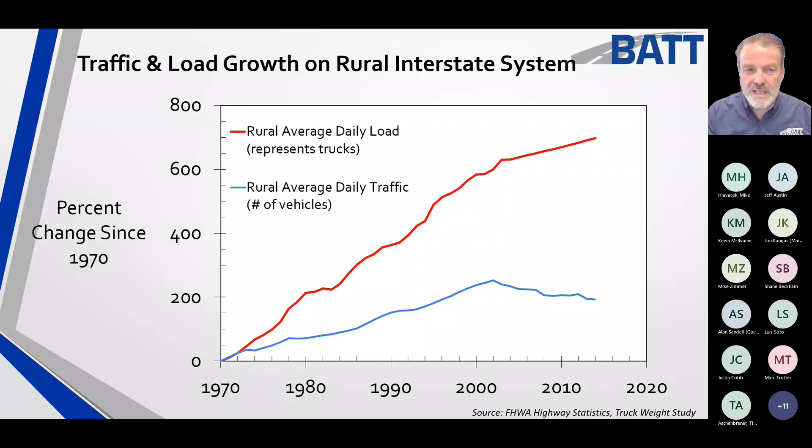So in today's world, I've got to modify to meet these things called balanced mix design. Today you're seeing these diagrams put out with cracking on one side of the graph and rutting on the other. I call it performance-engineered mix, I call it performance testing. The term that's caught on is balanced mix design, where we balance the rutting with the cracking.

In that process, we use a mix performance test on conditioned samples to address different modes of distress: cracking, aging, traffic, rutting, climate—all those different things—to put all that into a package to make sure that we can make a pavement last longer.

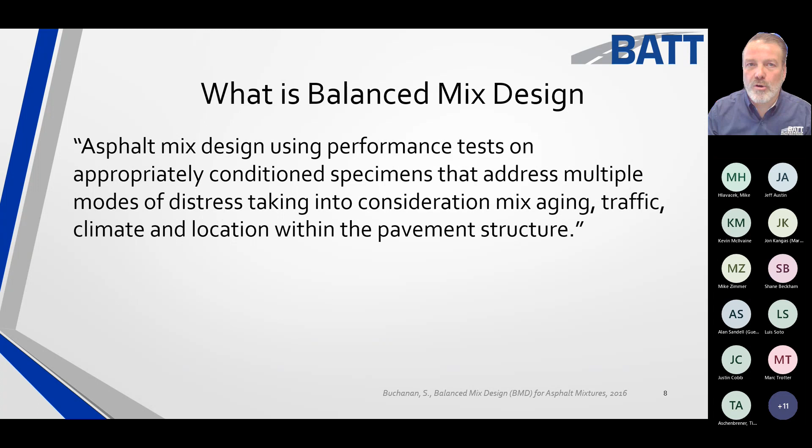Now this is just an example of taking a Kentucky mix that I worked with. In this mixture, we simply added asphalt. We were at 5.4%; now the state of Kentucky is more near 6% on their mixtures. But back in the time, about 10 years ago, we would just add asphalt to the mixture. You can see I added on this one 0.5%.

And my APA device at the time, and my beam fatigue test I was running, the needle never moved on that mixture. However, it became more compactable, which is another story—as we improve density in the field, we also extend pavement life. This is just looking simply at putting more asphalt in a mixture.

Then we found out if I continue to add more, it did exactly as I thought: my cracking would greatly increase, the top right corner, and my rutting would begin to go down. Now you may look at that and say, oh my goodness, my mixture is going to rut. Folks, our mixtures are so rut resistant today.

Moving the needle on that APA or Hamburg, I strongly encourage you to see how low can you go. Put some test sections out there, because we have way over-designed on rutting for most of our mixtures that I'm seeing today. We have a lot of room. That was on a mixture where I added up to 1% of asphalt to get that needle to even move.

Balanced mix design, if I look at it in this sense, and if I look at this plan here, this sort of looks like what's going on. This is the identical way, but on mine that I backed up, these two curves that are separated here didn't really separate on mine. Now, if I took them way out to the left, you would see that change a little bit. But the concept has been out a very long time, and some of these processes were not just invented. These concepts have been out for quite a long time.

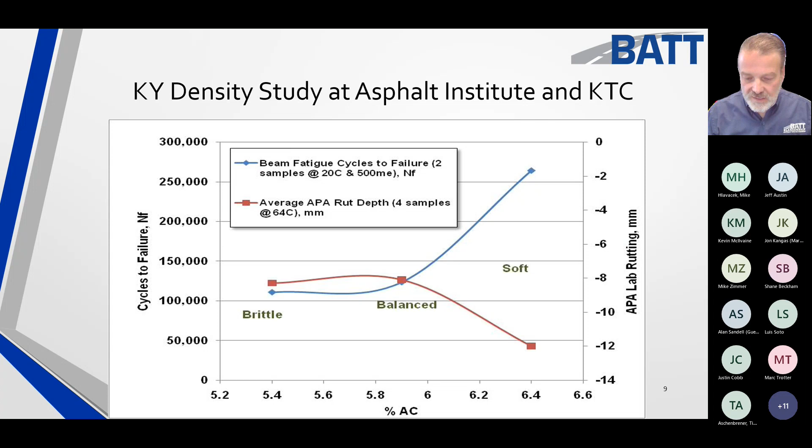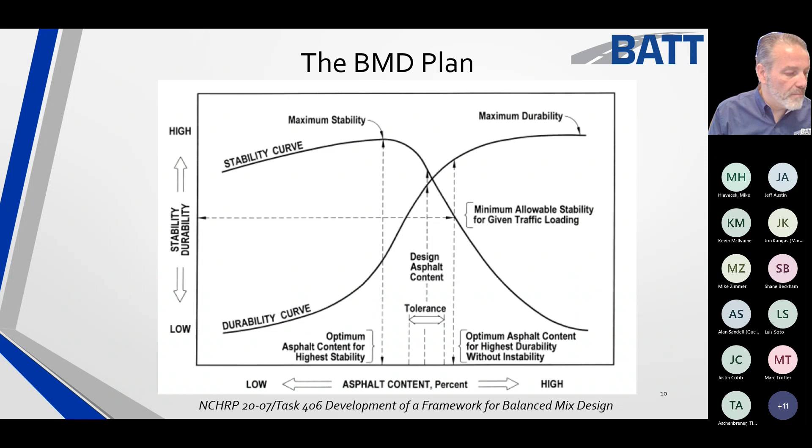So to get where I want to go, if I wanted to move over in this area to really increase my durability, I can't just add asphalt. Same thing here, I can't just add asphalt. I have got to open up my mixture to be able to allow it to accept more asphalt. So I've got to change the structure of my aggregates. Some cases that means washing the aggregates. Some cases that means a different size aggregate. And states right now, different contractors are exploring different options that can be looking at modification of the asphalt, modification of the mixture, and all of the above.

That's where the fiber comes in.

So why do we move back and forth from rutting and cracking? If I were to open this up to a discussion, the comments I would hear would be, hey, I remember in the 80s when we had rutting, and I remember the guys talking to me before that they had a problem with cracking, and we caused this problem. And now here we are today talking about cracking again, and we just have a pendulum that goes back and forth, and give it 20 years and we're going to be dealing with rutting again. I don't think so.

Yes, on where we've been, but now that we have these performance tests in place, Ideal CT, SCB, DCT, pick your poison on cracking, Hamburg, APA, flow number on rutting, Ideal RT, the hot IDT, whatever you may have, we have tools today that we didn't have 20 years ago. We did have them on a research level and in the laboratories, the bigger labs, but we didn't have these at a contractor level and a state level. And now we can measure rutting and cracking real time on the mix design process and in the field.

And as we continue to move into that, we're going to avoid getting into the rutting area while we continue to maximize our cracking performance. We have new glasses, if you want to think of it that way, that we just didn't have back then. So again, balanced mix design is about trying to balance the rutting and cracking components.

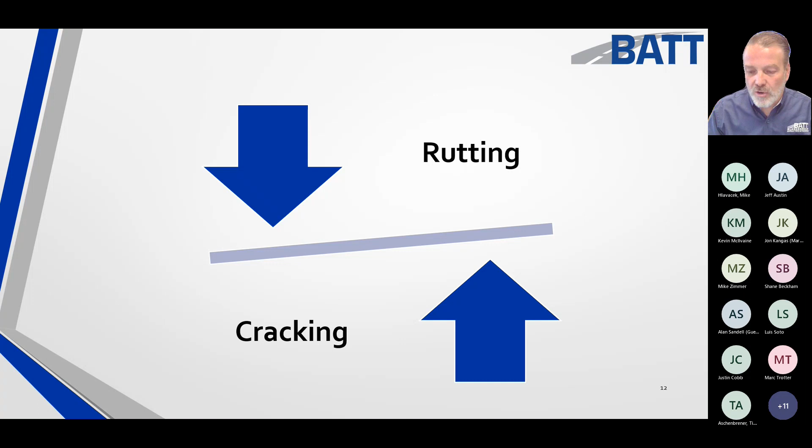Tim Aschenbrenner, since you're on, I will mention this one too. For the states that can, Michigan and other areas in the U.S., where you can find those pockets of aggregate that work well with SMA, you'll find out that you will not beat the rutting and cracking resistance of an SMA mixture. If you haven't looked into it, look at the Federal Highways Every Day Counts initiative and their TOPS program on encouraging the use of these higher performing mixtures.

So again, mix modifiers allow us to use local asphalt and local aggregates and make performance improvements at the plant. And then we can use a Hamburg wheel tracker and an Ideal CT simply to allow verification at the plant.

I recently got into a design where I was doing an interlayer type design for a contractor in a nearby state, and he was struggling to find the right aggregates over what the state had specified. This was sort of an experimental mix. He was having to bring things in from another state, and you can imagine the expense that gets into when you bring asphalt and aggregates in from another area, because now you're dealing with diesel cost, freight cost, on and on. And if you're dealing with asphalt, you're dealing with the timing of making sure you heat it up to get it back off the tanker. So all these factors play into where you're going to deliver your materials and the costs involved.

So keeping them local and being able to improve what we have locally is really, really important.

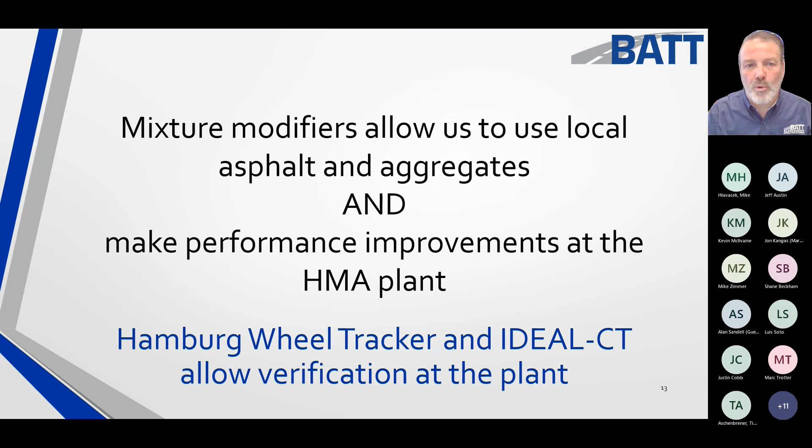A lot of the proof is in the testing. This was some work I did while working on an interlayer and also a fiber reinforced mix -- I'll show you where the fiber is in a moment. If I take a regular dense grade material, looking at ASTM D8225, say a dense grade I'd have here in Kentucky or the edge of Ohio or Indiana, I might get a 91, testing at 25C, all the normal parameters. Now I put fiber in it. Again, this isn't a repeated loading test, so I'm not really engaging these fibers except one time -- I'm just pulling it apart in an Ideal CT, a very simplistic index test. But it works to give us an indicator of what's going to happen.

I can raise my Ideal CT value, and then I put in more, and I raise it even more. Now what happens if I redesign that mixture into an interlayer? I can redesign it into an interlayer and take that number with the fiber up to 650.

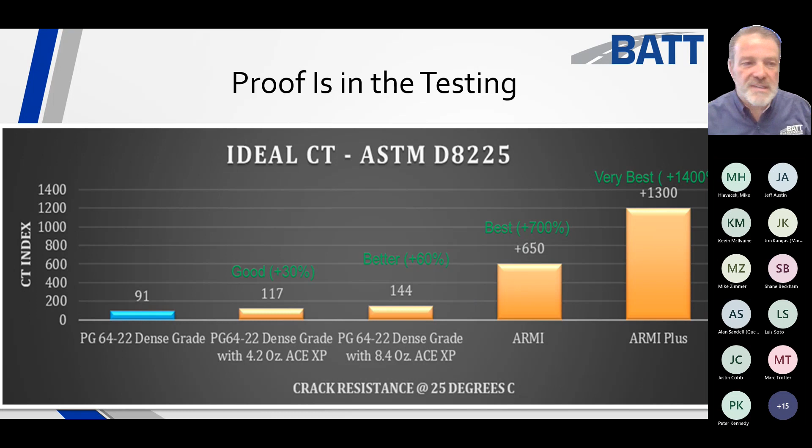I can take this mixture and bend it, twist it, and turn it. You cannot do that with normal hot mix asphalt. I can with a little polymer modification in this one and with fiber, and that's what you're seeing in that orange bar. If I take the polymer out and just leave the fiber, I get like a 650. That gives you an idea of where we can go by modifying a mixture. If I took all of that out, just this mixture alone with the high asphalt content would probably land around the 300 range. But you can see where we can go by adding the different materials.

So let's talk a little bit about -- just to educate, and what Brett is challenging you with today -- the production. What is fiber? Let's talk about the production, what it looks like in the field, some case studies, and the cost is another one mentioned in there.

I do not have a slide on the cost, so I want to go ahead and get the elephant out of the room instead of waiting to the end. I'll throw that one out to you right now. What I've seen as an engineer is where this has been bidding -- on larger jobs, I've seen the numbers come in lower; smaller jobs, they're higher because there's a setup cost. But typically, it can increase mixed cost about 10%, and that is a very rough number. It depends on what's bid to the contractor, what the contractor then bids to the agency or customer, the size of the job, the location, and so on. But that gives you an idea. Again, contact Surface Tech and contact Forta to get those specific details.

There's a lot of stuff in here today that I'm going to be showing you, talking about two products.

There's two brands out there. One is Surface Tech, and another one is Forta, Forta-Fi, by Forta Corporation. I am associated with Surface Tech, so what I show you is going to be as generic as I can for both of these products. I want to encourage you to reach out to both of these manufacturers.

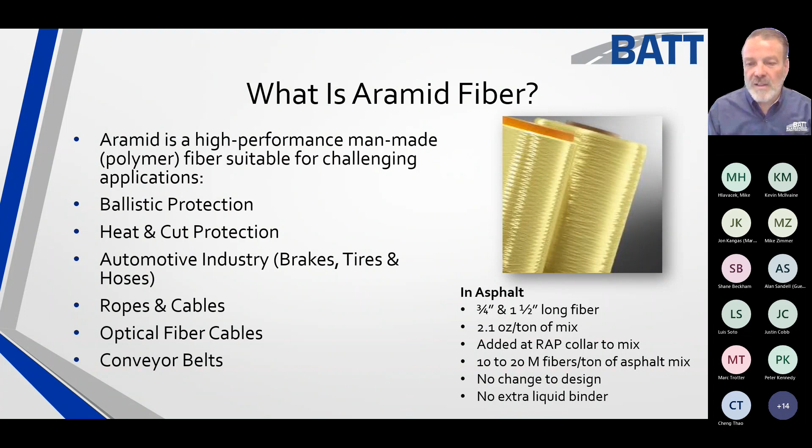This fiber is not cellulose fiber. It is not a poly fiber. It is not an acrylic fiber. This fiber is not made to absorb asphalt, not made to sponge the asphalt like you would see in an SMA to stop drain down. This fiber is made as a structural fiber and engineered. It's not a waste fiber, and it's cut to length for the specific use of enhancing the mixture.

Aramid, para-aramid for short, is a fiber that is actually stronger than steel. That's why it's used in the ballistics industry.

If you look on the chart, on the bottom is strain or movement, on the top is strength. This helps you understand the fibers you've seen before, like PET or cellulose fiber. PET actually had really good reviews back in the 90s when it was used, and it was going to stop cracking and did so many good things. It showed good on the Federal Highway ALF test facility, where it was excellent in cracking resistance. Then SuperPave came out, so the fiber sort of went away.

However, today you have aramid fiber that's heat resistant, not a waste fiber, cut to length, very useful. I'm going to continue to say in 10 years, maybe sooner, this is going to be as common as rebar in concrete, because the one thing we miss in asphalt is tensile reinforcement. We rely on the asphalt liquid itself to provide that, which is a variable in itself.

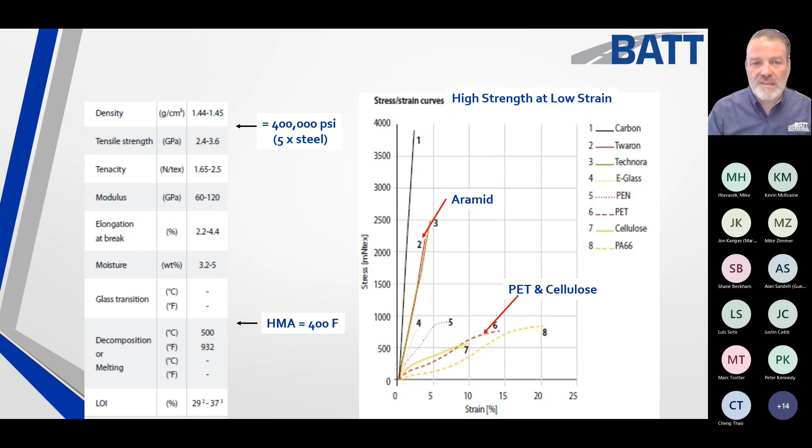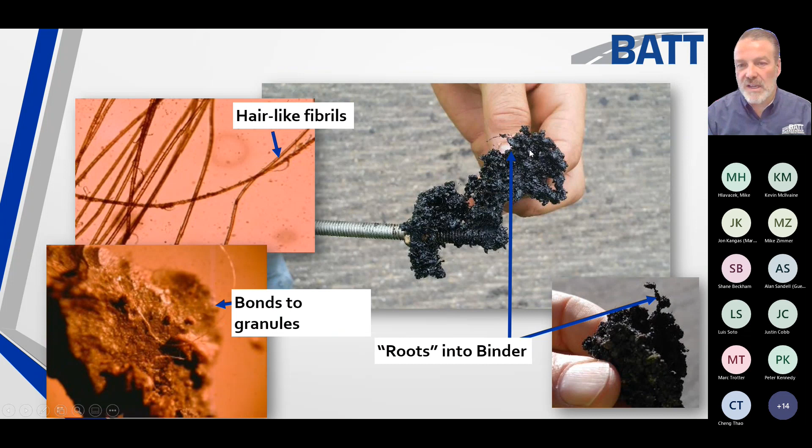Comparing it to polymer is another thing that's good to do. Now, first off, I love polymer modified asphalt. Those that know me know I have a strong background with polymer modification where we do this. It has to be done in a terminal where it's sheared in or stirred in. It has to be reacted where the polymer will swell. And the polymer has done really well.

It expands the performance grade, and on the right you see it improves cracking. You're adding it at the terminal. It expands the PG, improves adhesion of the binder to the aggregate, and improves mixture cohesion, holding it together. You do have to adjust for an increased temperature that comes with using the polymer modification, and there's little change in the mix design. Sometimes you see a tenth or two just because of the volumetrics, because you're dealing with a more viscous liquid that doesn't absorb into the aggregate.

Let's compare that now to the fiber reinforced asphalt. A way to think about this is para-aramid is polymer, by the way. Para-aramid is just putting the polymer in as a fiber, but a fiber that does not melt, a fiber that will stretch as it reinforces the mixture. So the fiber depends on the asphalt liquid to engage it, but is not dependent upon compatibility. Like you hear some people talk about, well I put REOB in, or I've got waxy this, or all these different things - asphalt dependency, or asphalt type, is not going to change how the fiber works in the mixture. But you do need asphalt to bond the fiber into the mixture.

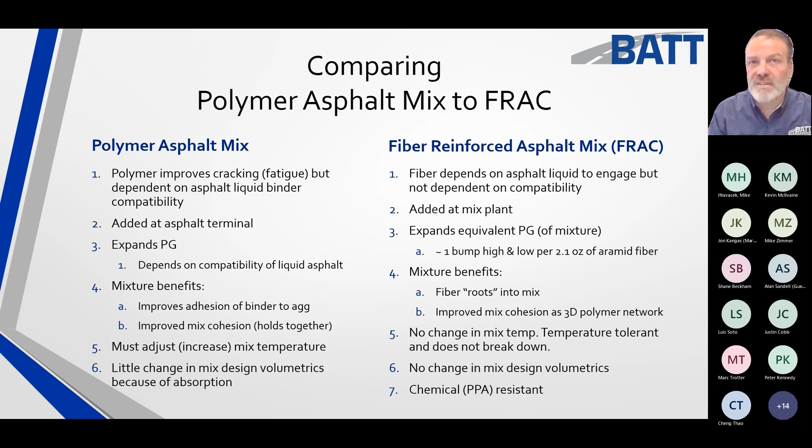So how do I bid, and then how do I build with Aramid fiber? Well, in the U.S. there are 2 suppliers, and talking to both - more so to Surface Tech - both would want you to give them notice. Don't call them up 24 hours before and say you got a job. It does take time - they have to coordinate getting the equipment, they have to coordinate getting the material to you, and so on. But both Surface Tech and Forta do supply the product.

FORTA-FI is the product on the right, and that's the one where they're using 2.1 ounces of Aramid plus 13.9 ounces of a plastic, like a sheath. I actually have some of that here, I'll pull it out and show you. This is what the Forta product looks like - the better picture is on the right versus what's in my hand. You can reach out to those guys for samples, and they'll send it to you in a bag.

Same thing with the guys that make the Ace XP with Surface Tech. In your area in Michigan, that's going to be supplied through Site Supply - a good client of mine. You're going to reach out to Kevin McIlvaine, Joe Dennis, and the folks up there who can help you with that. In that case, their product is 2.1 ounces of Aramid, as you see in the top left picture, bound with 1.3 ounces of Sasobit wax. So to give you an idea, I would put 5 of these sticks, maybe 6 sticks, in a sample in the laboratory.

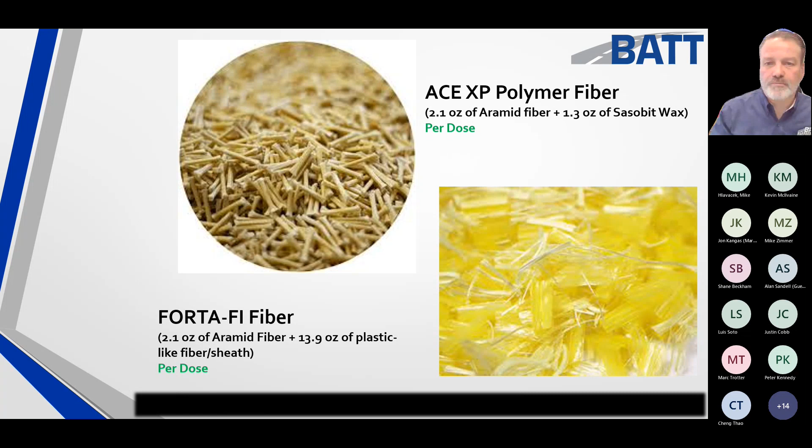The Ace XP polymer on top - how is Aramid fiber made? Well, it's actually a liquid. They take the chemical product that comes out of the refining process, hit it with an acid, turn it into a liquid, then pull it out of a machine and begin to spin a yarn with it. That's how they make the yarn, and that's how they weave the bulletproof vest and so on.

That yarn is what we're using here. There are different types - this one is about 8 microns, so that's about 1/10. Every one of these little fibers, if you hold it up close, you can see the little fibers coming off. They're about 1/10 the size of a hair on your head.

In this case, you take the Aramid fiber, add it to the wax, and you get the product on the right, which is bound up, looking almost like a Q-tip.

With Forta, the active ingredient, they're taking the same 2.1 ounces of the Aramid, and they wrap it in what I call a sheath, or a plastic - in that one they use usually about 13.9 ounces of plastic - and then you get the product on the right. Both products are designed so that when heated, the plastic or the wax goes away during the heating process and delivers the fiber into the mixture.

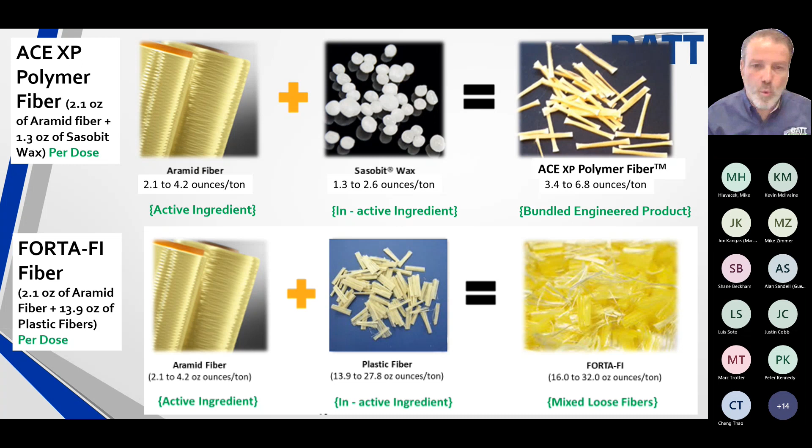Why can't I just take the fiber and put it in there? It's because this fiber is so lightweight it would blow away ever so quickly. The moment it hit the plant, it would end up in the bag house. That's why you have to weight the product to get it into the plant.

When bidding Aramid fiber, remember to contact a supplier early. Understand what the spec is calling for - is it a 1x or a 2x dose? We'll look at a spec here in a moment. What's the length of the fiber? Consider the size of the project and days of production. If it's a larger project, you may want to buy a machine and work with the suppliers of these dosing machines, or you may just want to rent. Do you need assistance, a technician to help run it, or do you want to self-certify and get trained?

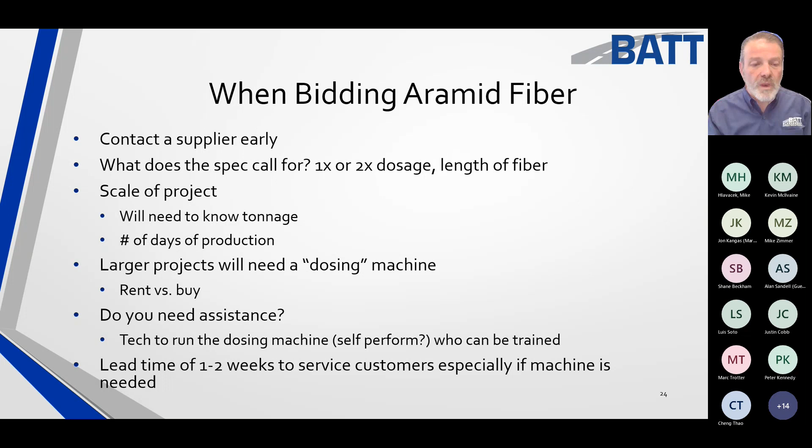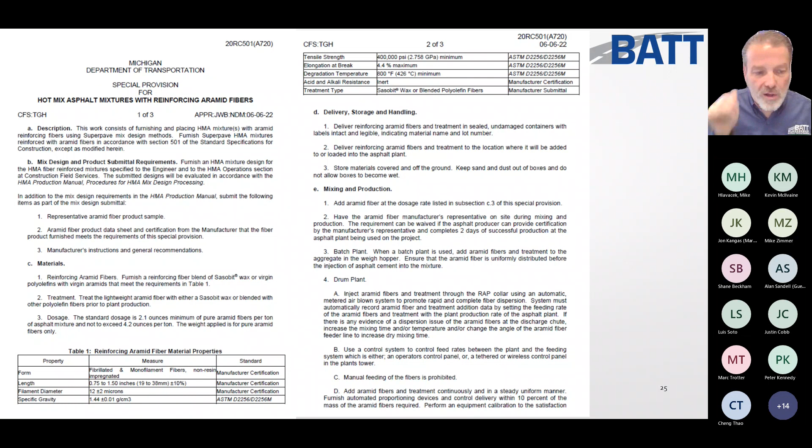Again, looking for a lead time of 1 to 2 weeks. The Michigan Department has a special provision for Aramid fibers shown here on the screen - this is really small text, but if you need it, I'm sure it could be sent to you. It calls out the length, the diameter, the gravity, and so on. It talks about how it's put in during production at the plant, drum or batch plant, and about sampling it and understanding it all the way down. Of course, the favorite question there is how do you measure and pay for it?

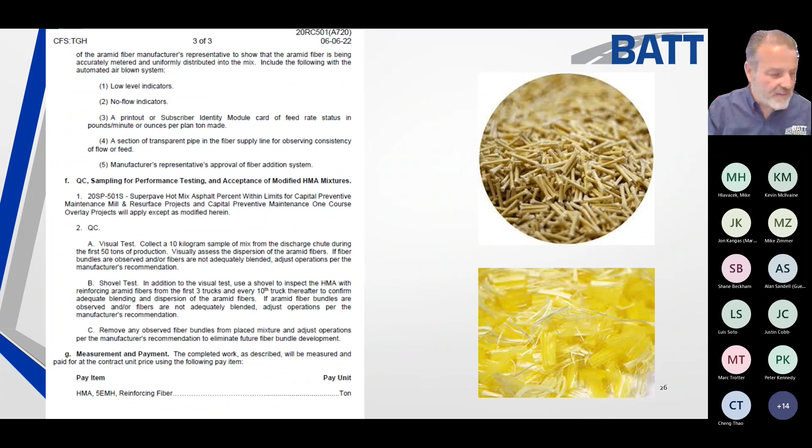And that's always a good question - how do you know the fiber's even in the mixture? We're going to talk about that in just a moment.

When I go to design with Aramid fiber, let me show you how to get it into the mixture first, and then we'll look at it in the field. If you go into the laboratory, keep in mind you're going to need a precision scale - you can't use something that just reads to 0.0 grams. You need something that reads to 3 or 4 decimal places.

There's going to be no change in the mix design. I've verified it up to a 4x dose, even done more than that. Follow the manufacturer's instructions, whether it's Forta Corporation or Site Supply with Surface Tech. Check with those guys on getting the latest information on how to introduce it into the mixture.

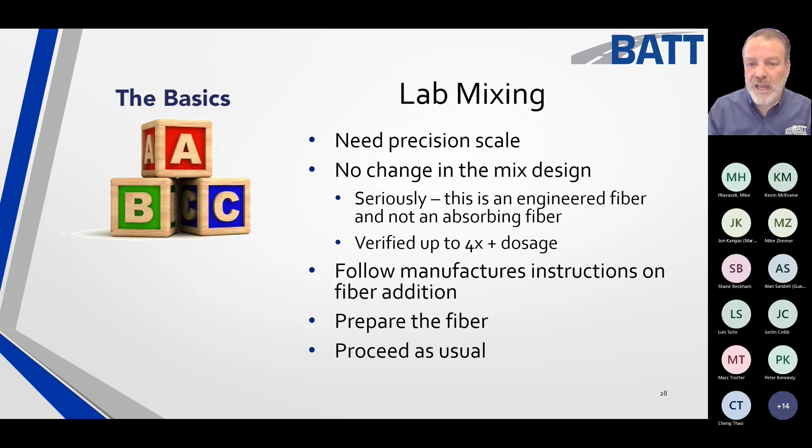It's always best to sample at the plant, but if you have to do it in the lab, there are ways to do that. You're going to prepare the fiber and then just proceed as usual. So the goal of lab mixing is to disperse the fiber similar to how it would disperse at a plant, in about 30 seconds of mixing time.

In the lab procedure, we're going to use a bucket mixer. You cannot use a wire whip mixer. A wire whip mixer will pick it all up.

As one guy told me, he said, 'Hey, I got it all in there, but I didn't see a difference in my laboratory testing.' He walked me through the process, and he said, 'Well, all the fiber ended up on the wire whip. So don't worry, I got it taken care of. I scraped off all the fiber. I threw it in the top of the pan so I know the fiber's in there.'

Sounds logical, but a bunch of fiber sprinkled on the top of a pan is not good, and it would be equivalent to sprinkling flour on a bunch of eggs and saying, 'I just made a cake.' It doesn't work that way. It has to be intermixed.

So in this case, I'm going to be using 2.1 ounces of Aramid in my mixing process. Now what's that mean? If I'm looking at it with just a pure Aramid, I'm looking at 0.0066%. Wrap your head around that, a really small amount. Typical fiber, you may be looking at 0.3%, or 0.03 for some. This is a really lightweight fiber, so it's 0.006%.

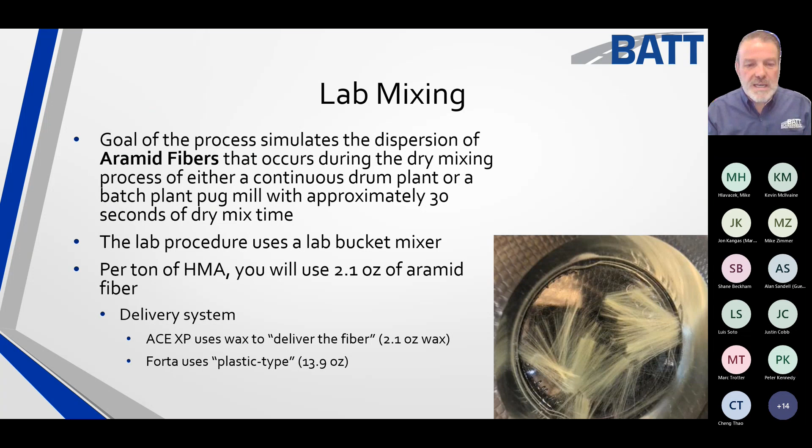Again, that's why you have to have a precision scale. When you're mixing and you put it in there, you do not want to end up with this. If I just put it in there and spin it around, I just made yarn, and that is not what I want to do.

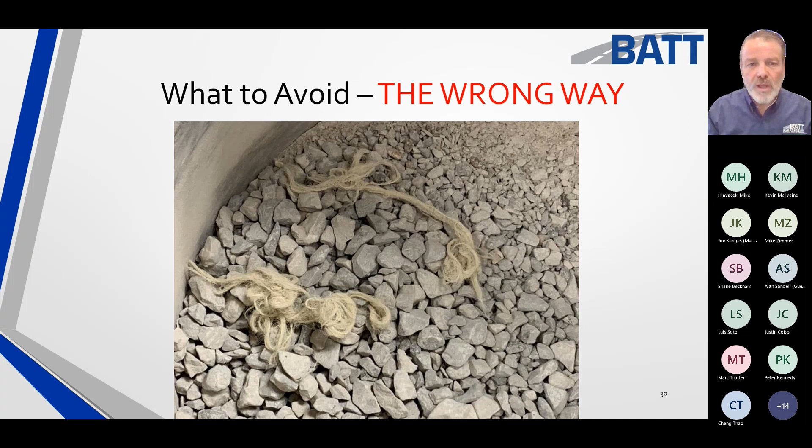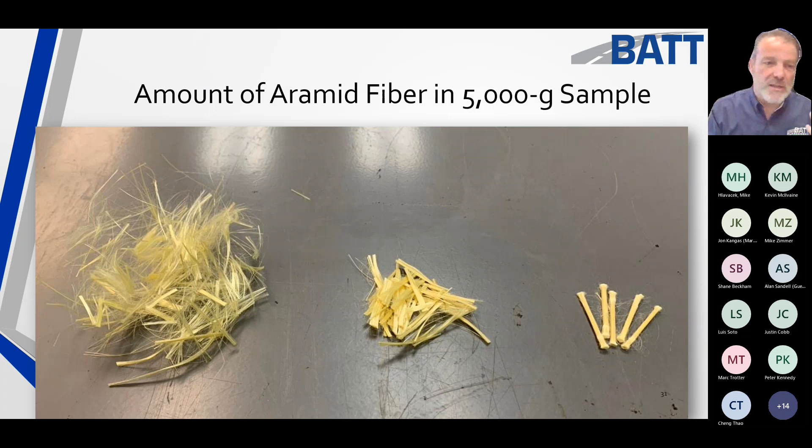What I have to do is separate my fiber. If you're doing this with the Surface Tech guys, they'll actually send you bagged fiber that's already pre-separated, which is going to look more like what you see on the left. But even in the laboratory, we break it down further than that to get it ready. So you're going to take the fiber and break it down from the package into really small fibers to get them ready for the mix design.

I'm going to separate it, then measure the amount that I have. I'm going to store it in a closed container. Why do that? Even a small sneeze or a little puff of air can blow the fibers out of that tin. So get a small tin cup or a cup, and put a bag or something over the top of it to keep the fibers in.

Again, an example is a 5,000 gram batch only needs 0.33 grams of the pure aramid. I'm not talking about the wax or the plastic, just the pure aramid, 0.33 grams. And on the right is an example of a precision scale where you have the enclosed glass area.

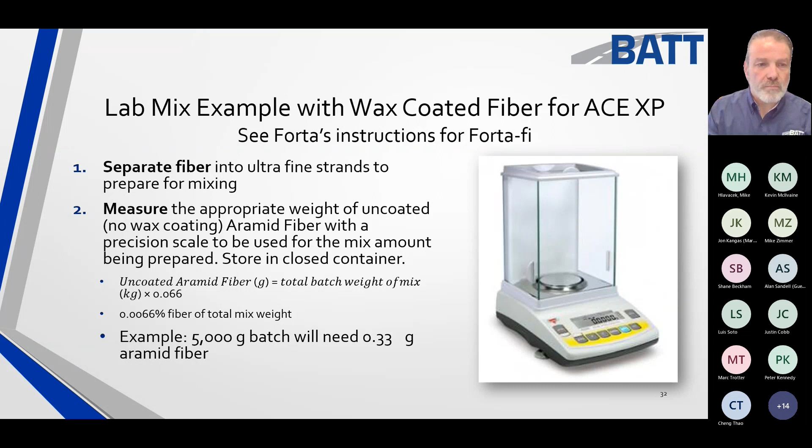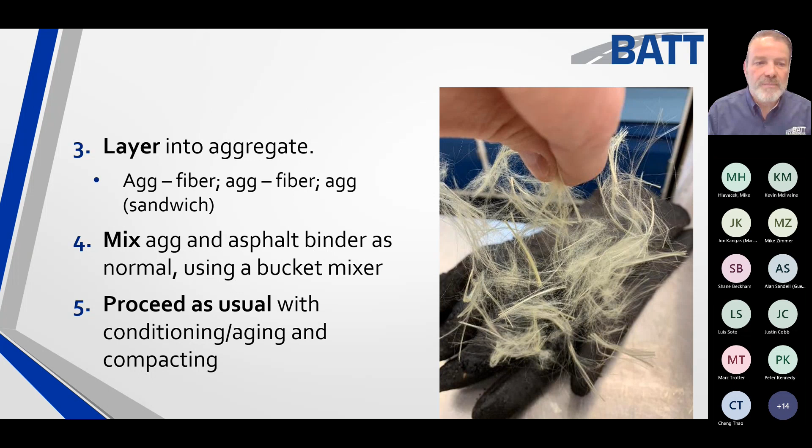You're going to layer this into the aggregate, such as aggregate fiber. And again, there's directions and videos out there that they can send you to explain how to do it. You're going to mix it as usual, and then proceed as usual with conditioning, aging, compacting. And you're going to get something that looks like what you see here. You'll see the fibers become very obvious that they're mixed in, and that's what you're wanting to see.

Now, in the field, when you're paving, you won't see this unless you're luting. With the lute, the scraper, or the shovel, you'll see the fibers on the end, and that's how you know the fiber's in there. Otherwise, you don't even notice it's there.

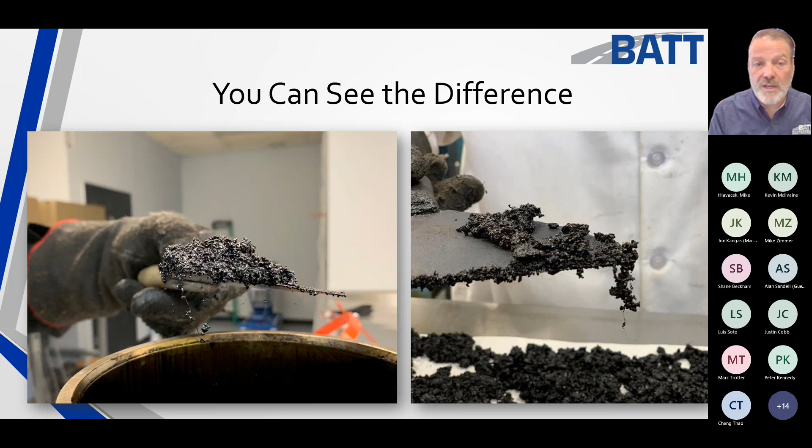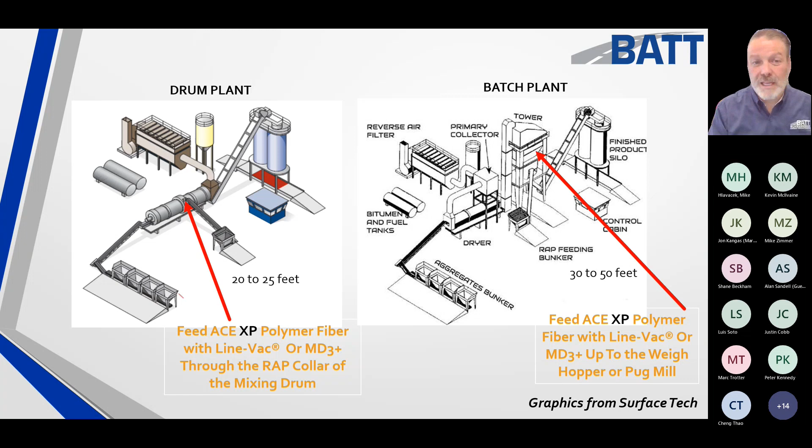If I'm putting it in at a plant, at a drum plant, you would feed it into the RAP collar batch plant. It's going to go into the weigh hopper or pug mill. Again, talk to your individual manufacturers for details.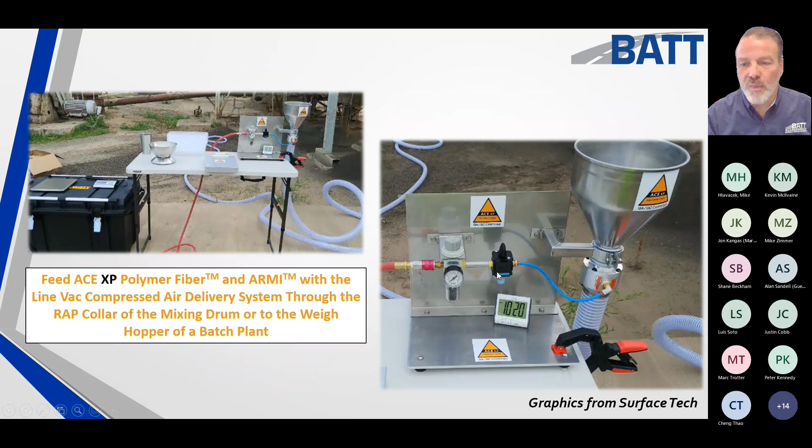This is an example of Surface Tech's mobile system, or their smaller system, where they can use a small line vac system, weigh out the fiber, and put it in what they call hand dosing. That's again for a really small job. That is all put into a kit that you see here, what they call a line vac kit.

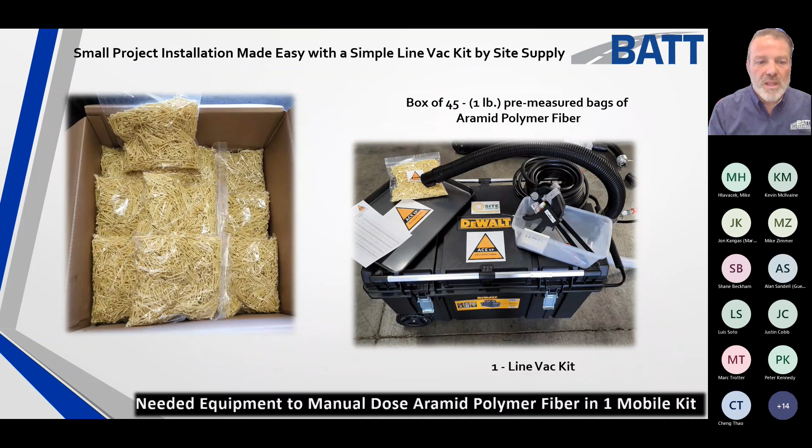There is a system out there, and I don't have the picture here, but I do want to mention it - go check out the Forta Fibers system. They also have an automated dosing system that will blow the fibers into the plant, and they can measure that and provide reports at the end of the day on the amount that goes in.

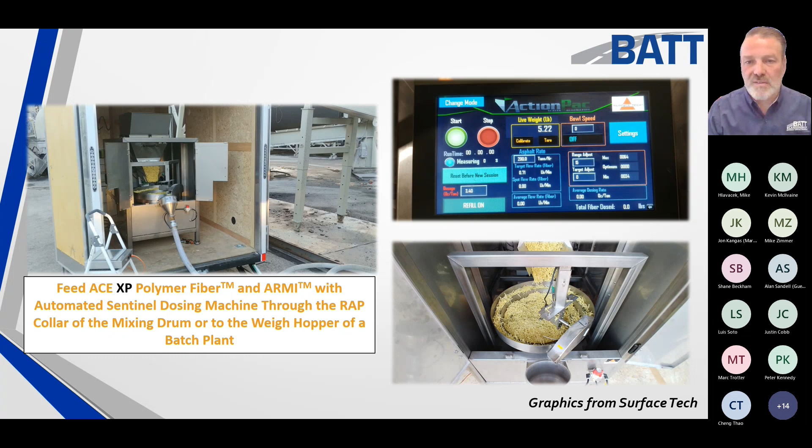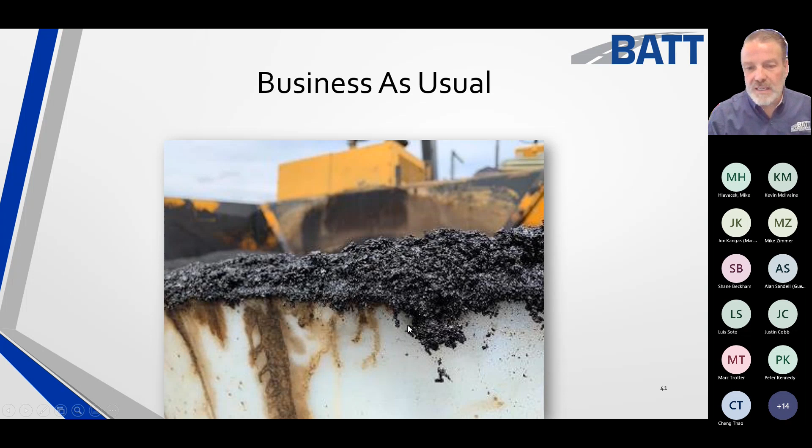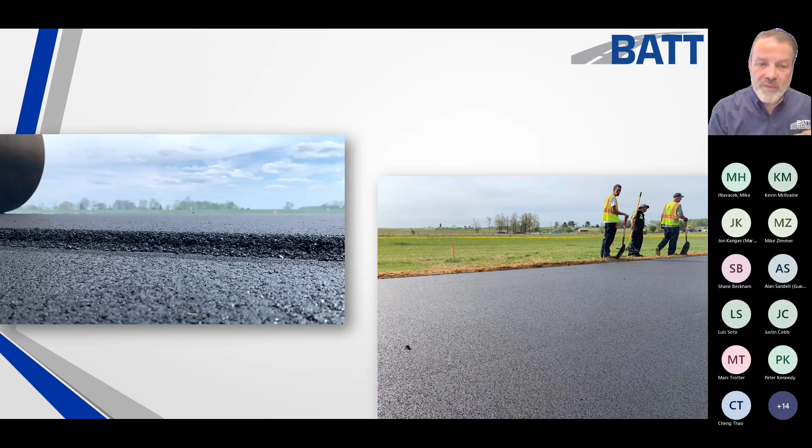If I look at it in the field, again, it's business as usual. I can look on the front of the paver and see the fibers within the asphalt, but if I look into the field, I'm seeing regular asphalt. These are two projects that were fiber, so you don't see fiber sticking up everywhere - it just disappears into the mixture.

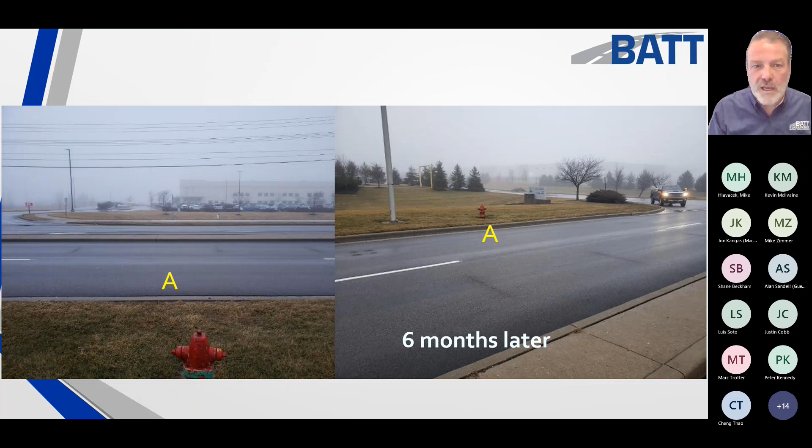A couple of case studies - I'm going to go through these rather quickly, but the point is just showing you some cracking data. This one was done up in Plainfield, Indiana. This is one where your conventional mix - you see where the cracks are - is placed as compared to the fiber mix. That's not saying our conventional mixes are bad - conventional mixes are conventional mixes. It's just saying that when I put the fiber reinforcement in, I'm enhancing that performance. And it makes sense, right? Like rebar helps with cracking in concrete, aramid fiber is going to help with cracking in asphalt.

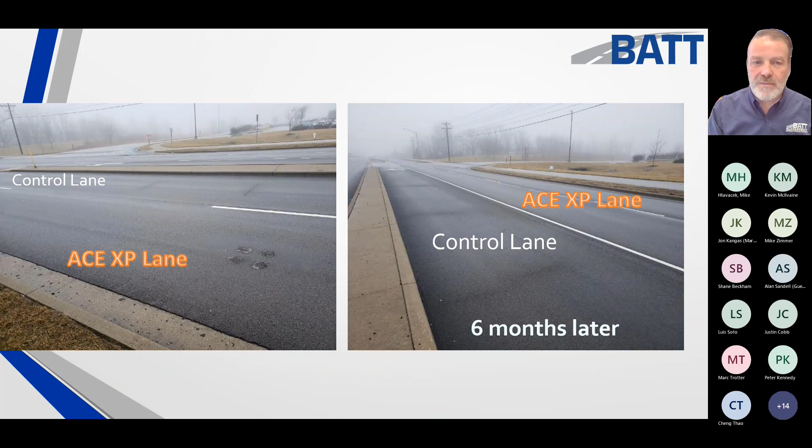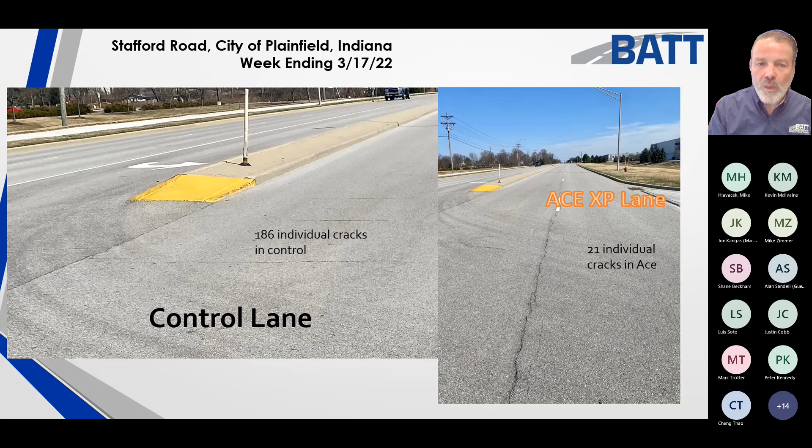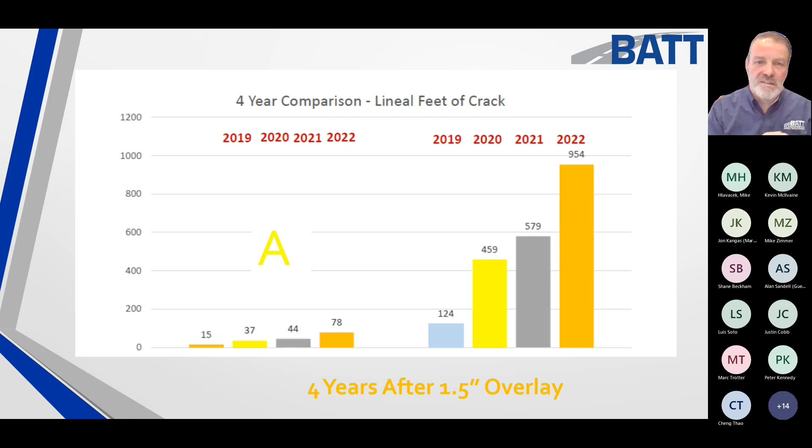I look at other ones, and you can begin to see here the fiber lanes versus the control lanes. Well, that's all good and fine, and I can show you that all day long, because you could say maybe there's concrete under one - you've got to know what's underneath the pavement. Bottom line, the proof comes when you look at it over and over, not just one year, and then you begin to compile it, and you understand that my fiber reinforced mix, after 4 years, has only 78 linear feet of cracking compared to my conventional mix that has 954 feet of cracking. The only difference between the 78 and 954 is that fiber was added to this mixture. Same asphalt content, same week of placement, same area, same mix design, on and on.

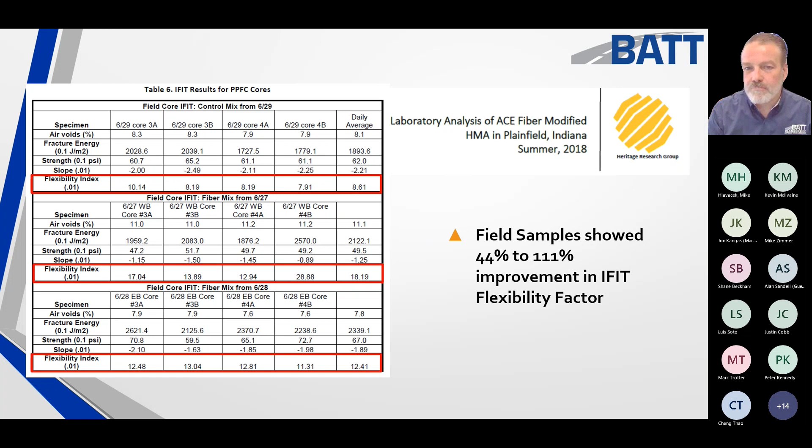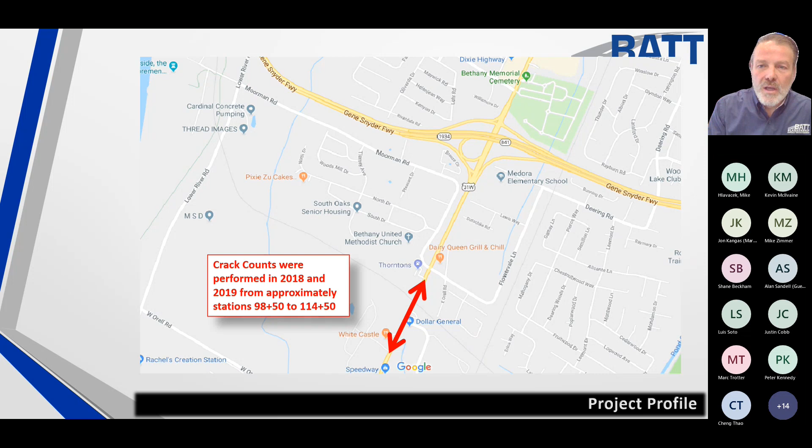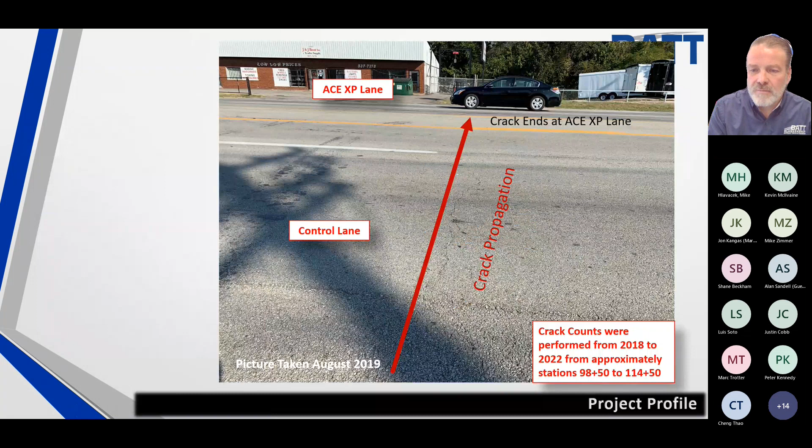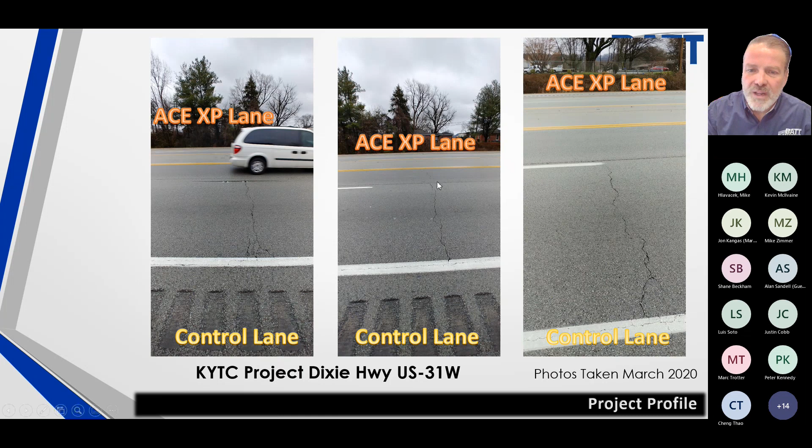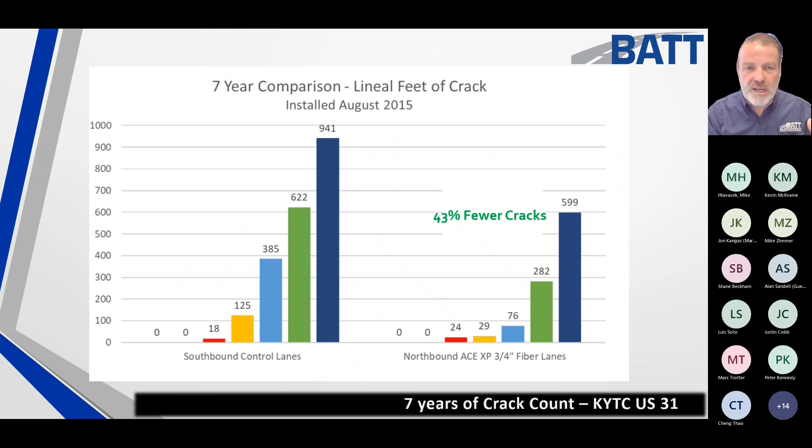Guys, to Site Supply, thank you for continuing to go out and get this data. This is the type of data that engineers like myself need, not just to convince me, but to be able to put these projects out and have confidence knowing what I'm getting into - it's proving out what we have seen in the lab for the past 5-6 years. Love's Travel Stop now calls out fiber on every job that goes out into the U.S.

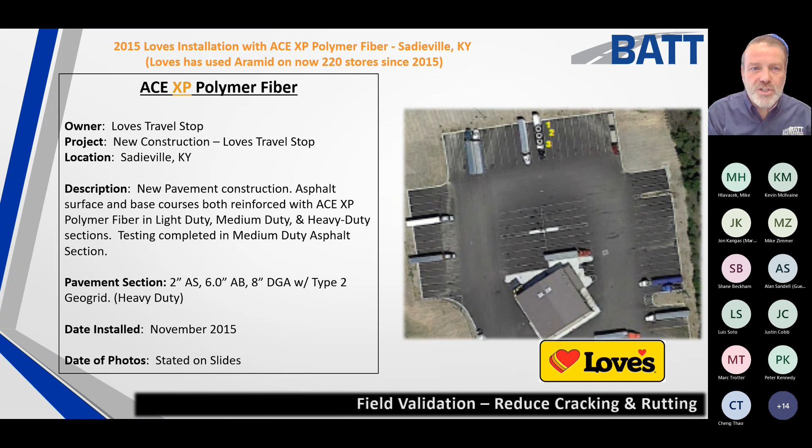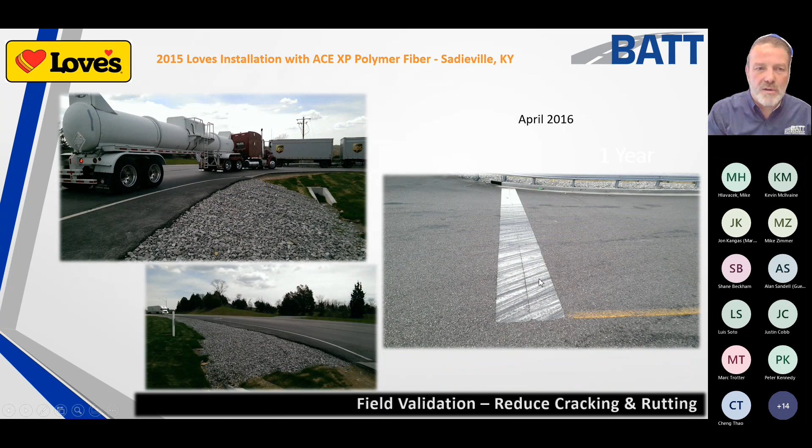And why is that? Because they continue to see performance, not just after 1 year, not just after 2 years, but after 7 years, they're continuing to be happy with the performance they're seeing.

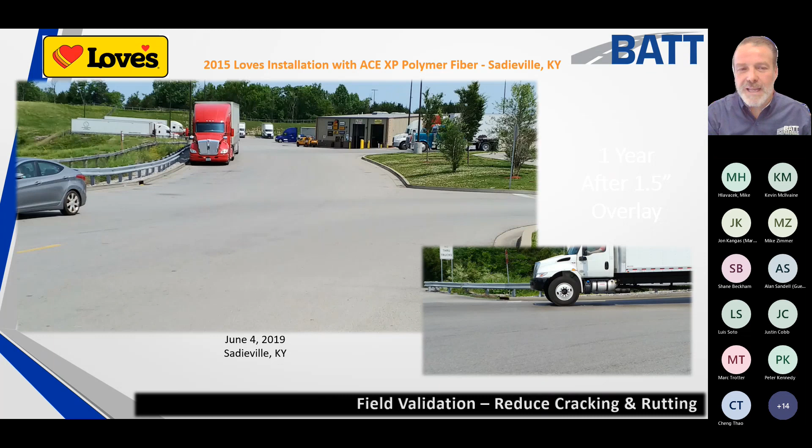This one is in Kentucky. This was the first one done by Love's. Just to give you an idea of what a Love's Travel Stop typically looks like, this is a whole different base, whole different area, but it's not uncommon to see something like on the right, where you get a lot of cracking compared to the left where it looks better.

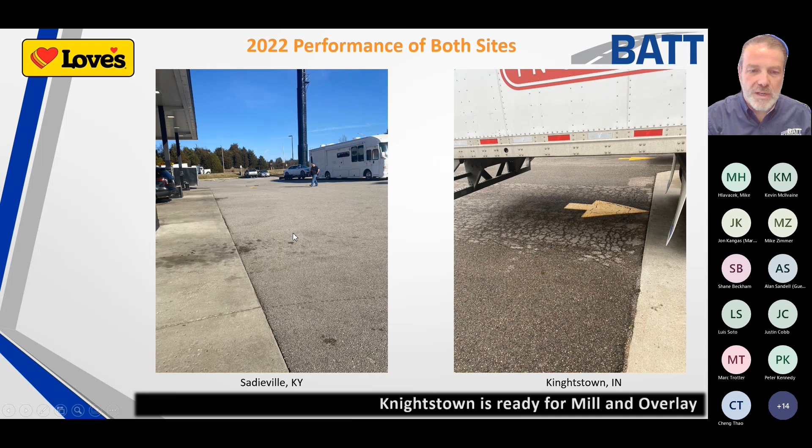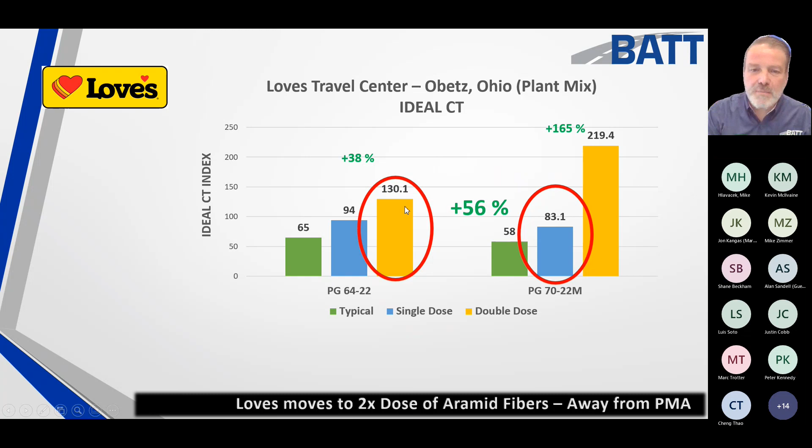So what's that look like? Well, if you go and pull the mixture, this is one that was done from Love's up in Obetz, an Ohio project. This one is an Ideal CT where I'm comparing, and again you see an improvement in Ideal CT compared to the 7022 with modification. I see Hamburg values that look good.

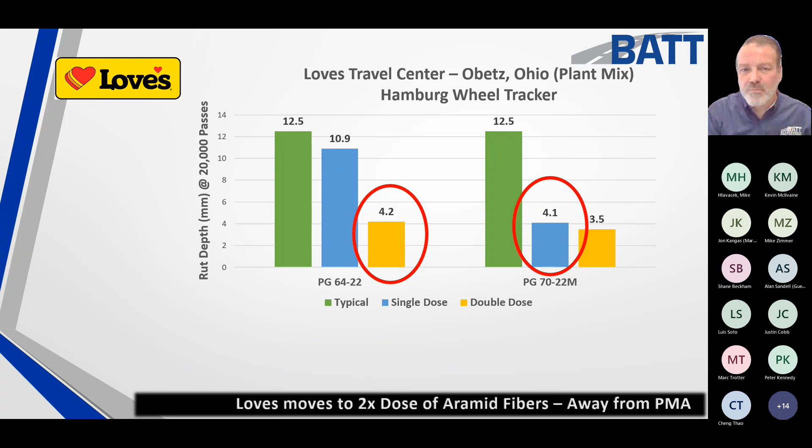Prove it in the lab, prove it in the field. With that, Brett, I could go on with data and have fun with that all day long. Bottom line, I'm impressed with fiber. I think you're going to see it become more and more common. Yes, it helps with modulus. Yes, it helps with rutting. The big news is it helps with cracking, and you'll see results quickly.

And you want me to move on to the next slide for the closing slides? It doesn't matter much, I think the next slide is probably a duplicate of this information anyhow.

Again, thanks Phil for coming on and educating us a bit on Aramid fibers. Sounds like you could talk for days on this. I think we just scratched the surface, but it was very helpful. Reminder, if you have any questions, feel free to type them in the chat.

I do have a couple questions here. Actually, there's a question right there. So Allison from MDOT has a question for you: if you have any statistics on cracking comparisons longer than 7 years, over 12 years?

Boy, that's a good one. I wish. I've only been working with it since 2015. I believe Aramid fibers were introduced sometime in the 90s. I do not have data that goes back that long. The trends I'm seeing are this: it's polymer. We know documented proof that polymers extend pavement life 3 to 5 years. I think you're going to get that and more with Aramid fiber, but I do not have anything past what I'm showing you. I've gone out, I've done FWD data where we've looked at structural improvements of 20%. Do I have anything at 12 years? I do not. However, talk to me in about 5 years and I will.